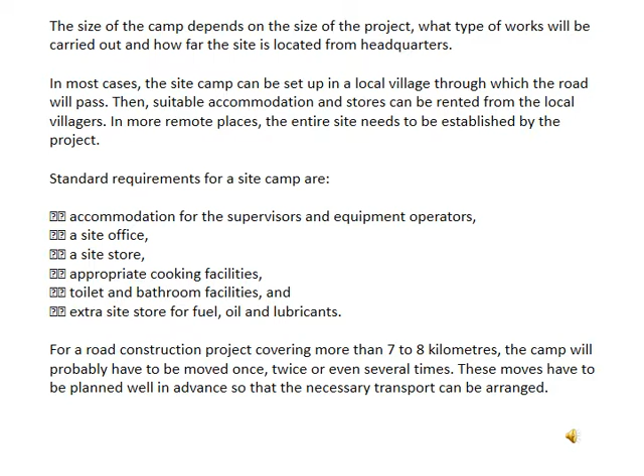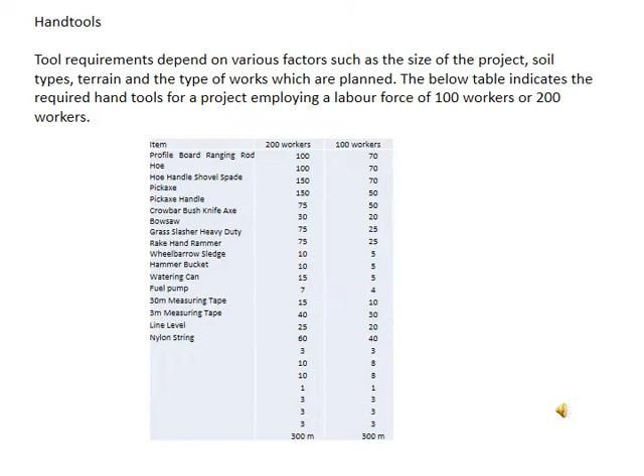Then once we are using the hand tools, all hand tools need to be maintained. All the hand tools need to be sharpened, and all the handles firmly fitted, not damaged. And if you find damage on site, you need to report to the storekeeper and have it replaced.

And for large projects, also employ a person to maintain and repair the hand tools, and also check with the local villagers; the blacksmith and carpenter need to be utilized. Also the camp is equipped with an effective sharpening tool and sufficient supply of spare parts, and the cutting edges of the axes, hoes and grass slashers are normally sharpened with a whetstone.

The edges of the other cutting tools are best kept sharp by selecting the flat, half round, and round file. For the saw, a small triangular shaped file. So those are maintenance of the hand tools.

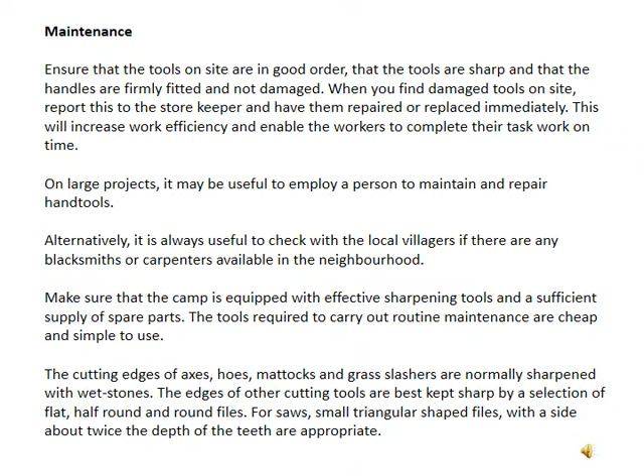A simple vice should be available at the site store, enabling the storekeeper to work effectively. This is important for the simple vice. All the spare handles must be available, and do not rely on makeshift handles made locally on site.

Wheelbarrows need to be maintained serviceable. And broken ones should be replaced before use again. So this is the guide for the devices and equipment to be maintained.

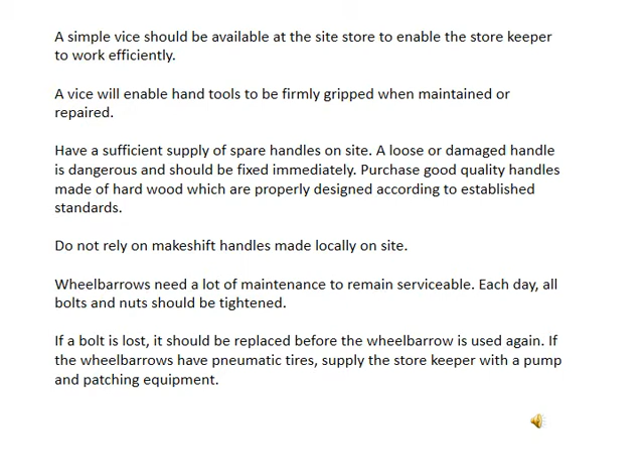There are tool stores. Tools are issued by the storekeeper to the workers every morning and returned in the afternoon after the completion of the work. Ensure that the workers are issued with the correct types of tools corresponding to the work activities they will be carrying out. The storekeeper is responsible for keeping full records of the tools and controlling the daily issue of the tools to the workers.

The total amount of tools on the site needs to be counted regularly and reported back to the headquarters. The size of the stores depends on the amount of tools to be stored. When the road site is isolated, the store has to be well stocked and therefore tends to be larger in size. The tools should be stored in a dry and secure place.

Stock items neatly so that they can easily be counted. Stock different items separately, and stock items of different sizes separately. If necessary, employ a watchman to guard the stores when the storekeeper is off duty. So this is a kind of store required for the tools.

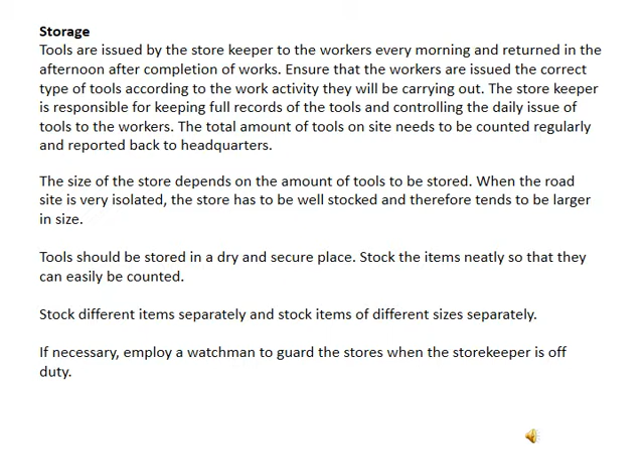Each piece of the equipment has an operator manual which specifies where the lubrication and adjustments are required. As a rule of thumb, the following activities should be carried out on a daily basis. Clean and check the lubrication oil level, radiator water level, hydraulic oil level, hydraulic hose and the couplings, grease nipples and the track, battery terminals and battery water, connections from the alternator, the V-belt and the tension, tire

pressure and the tracks, transmission oil level, brake and clutch fluid level, and the nuts and bolts of the buckets and tracks. Those need to be cleaned and checked.

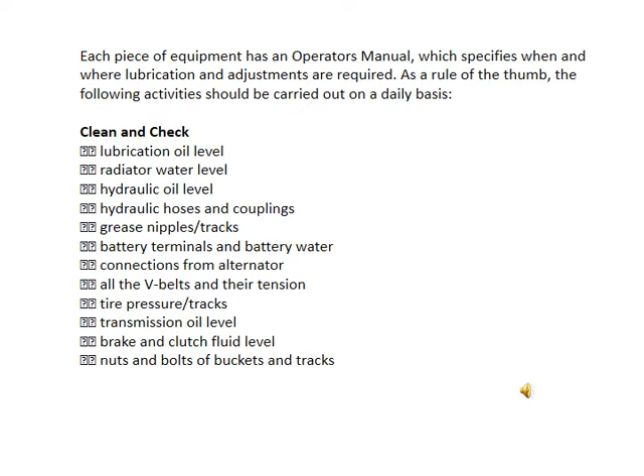Supply of material should be made well in advance of its planned consumption. Ensure that sufficient materials are available on site before commencing the works for which the materials are planned, and notify the engineer in good time when stores need to be replenished. When the materials are received on the site, it is the responsibility of the storekeeper to inspect and verify that stores are in good order and the correct quantity. Finally, the materials are recorded in the store's ledger.

Fuel oil and lubricants should be stored separately away from the other supplies. These items can be a fire hazard if not treated properly. Make sure that there are no open fires nearby, such as the fireplace for cooking, etc. Fuel oil is normally stored in drums. Make sure that all consumption of fuel oil and lubricants is properly recorded and accounted for. So this is how to keep the material store, the fuel oil and lubricants.

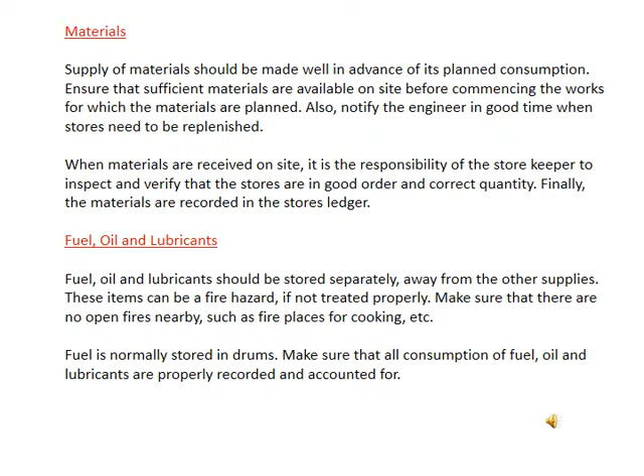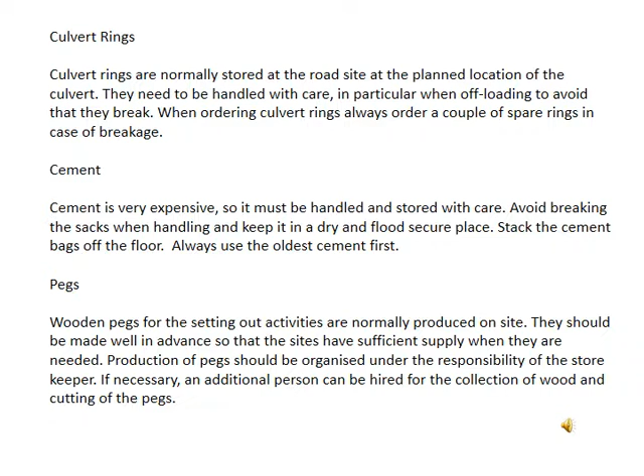Basic principle of setting out: before we start, these are the rules for making a setting out. The commonly used setting out procedure is based on the use of a series of profile boards and string lines, giving control of the levels during the construction. As a result, the method became known as the Profile Board Method. The basic principle when using profile posts is that when we set them out, we are putting a series of level boards that show us a level 1 meter above the completed construction level.

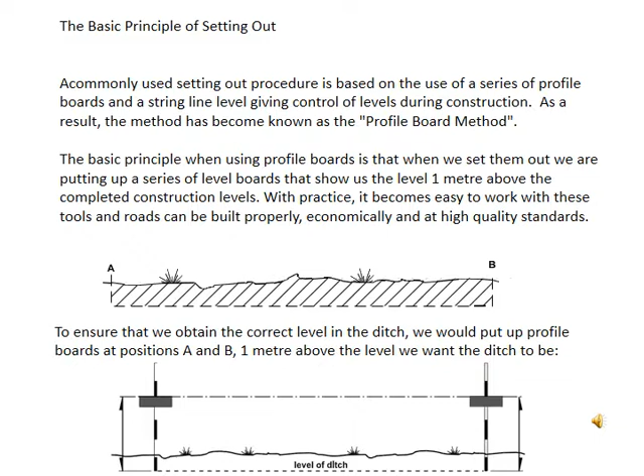The profile posts' positions need to be placed here. The traveler is the third profile board so we can move around.

It is known as the traveling profile or the traveler, that profile with the traveler. Along the line from A to B, we excavate slots to the level of the ditch. We place the traveler in the slot and sight from the profile board, position A, to the profile board in position B. So this is the traveler we need to provide.

So to provide good guidance, our slots are done at regular intervals every 4 to 5 meters along the sight line. When sufficient slots have been done, the worker can start excavating the ditch by joining the slots. The traveler can be used to check that the finished work is at the correct level and there are no high or low spots. So this is the way we make the traveler.

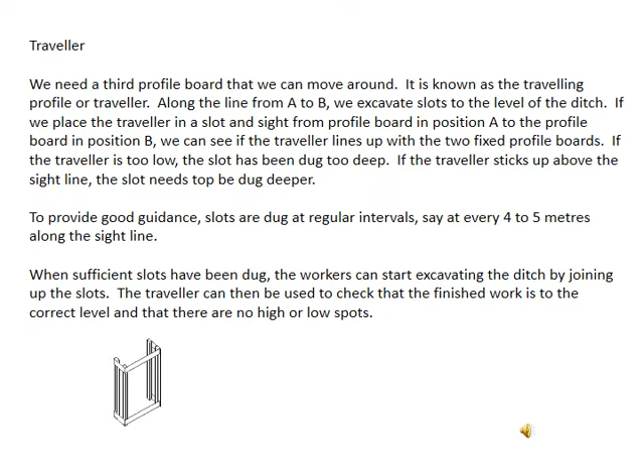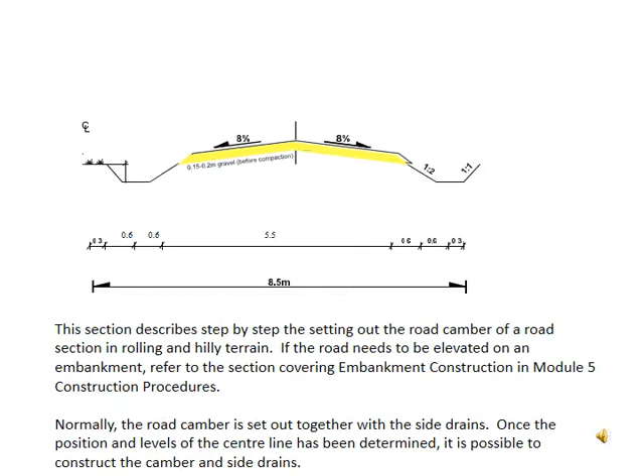When setting out the road camber and the side drains, it is important to reduce the amount of excavation to a minimum by following the existing level of the terrain along the road line. The procedure described below is the efficient way of setting out the road levels.

Step 1: Using the previously set center line, set the ranging rods at 10 meter intervals along the center line for a section of 50 to 100 meters. So the 10 meter intervals and a section of 50 to 100 meters have to be set out.

At the start of the section, measure the position of the road shoulder and the outer end of the side drain from the center line. The width is assigned at the other end of the section, and place a wooden peg nail at the edge of the ranging rod.

Step 2: Once the position of the road has been set out at the start and end of the road section, set the intermediate ranging rod at intervals of 10 meters along the road shoulder and the side drains. So this is the setting out procedure.

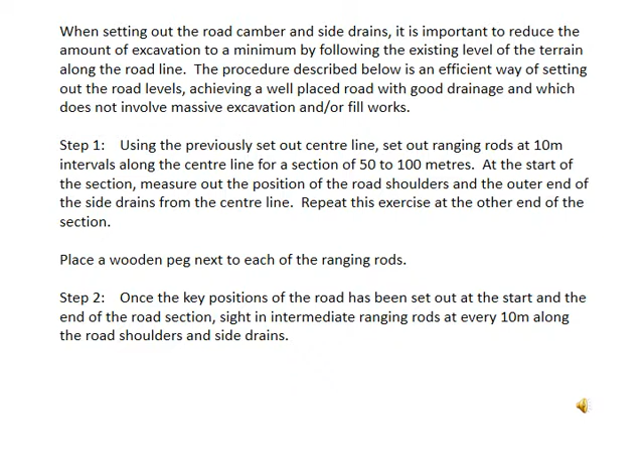Step 3: On the center line of the road, fix the first profile board. This profile may already be in position as the last profile from the previous setting out. If not, measure 1 meter up from the existing ground level and mark the level on the ranging rod.

Fit the profile board to the ranging rod so that the top edge of the profile board is at the mark made on the rod. So in this case, you can see the profile board.

Go to the center line, reaching the rod at the other end of the road section, and repeat the procedure, measuring 1 meter from the ground level.

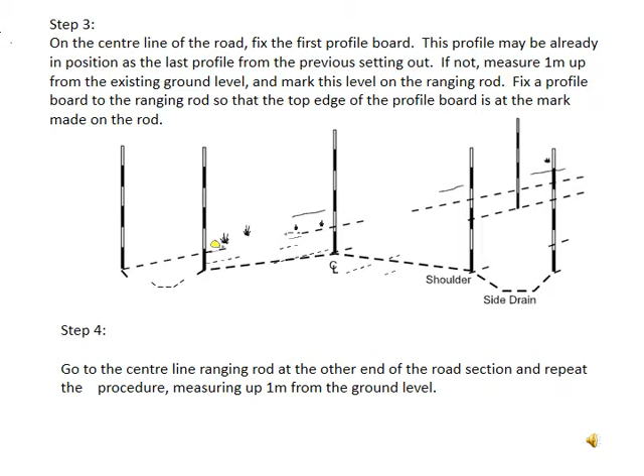In this diagram, you can see the stepwise setup development on the profile book. By sighting the intermediate profile from the end, fix the profile board on the intermediate ranging rods along the center line so that they can all be at the same level.

So we can put the same level on the profile board, and you can also set it up.

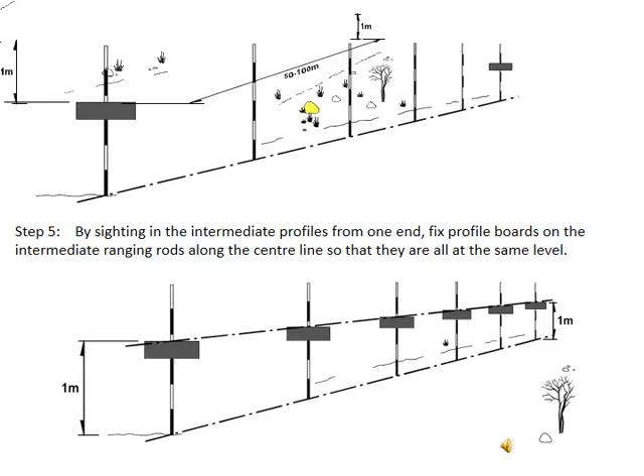Check the height of each profile board above the ground level. If the height is approximately 1 meter, there is no need to adjust them, and you can use the level of the profile as it is.

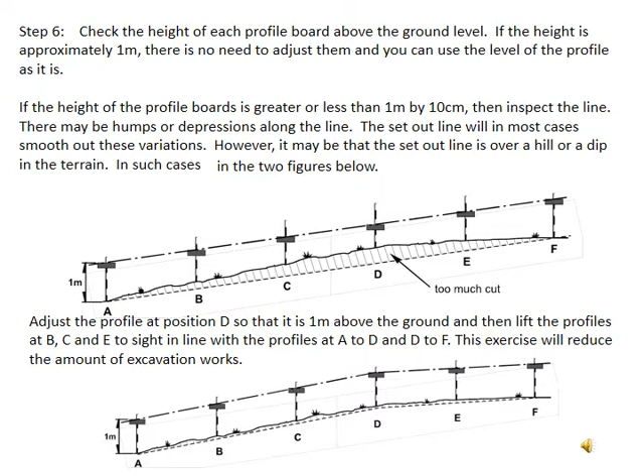So that when we are setting out the profile posts, this is the general rule: it is better to lift the profile rather than to drop them.

Try to keep the lifts and drops and keep it to less than 10 centimeters. Try to match the road level to the terrain and use the profile to get a picture of the vertical alignment. Before starting on the next step, make sure that the side drain can be emptied.

It is important to spend time on step 7, transferring the level to the ranging rods at the outer end of the side drain.

Start with the beginning of your road using the string and the line level, transfer the level of the profile board at the center line to the ditches on both sides of the road.

Once the levels are set out with the profile board, mark the level on pegs next to each ranging rod, and repeat this procedure for the same ranging rod at the other end of the road section.

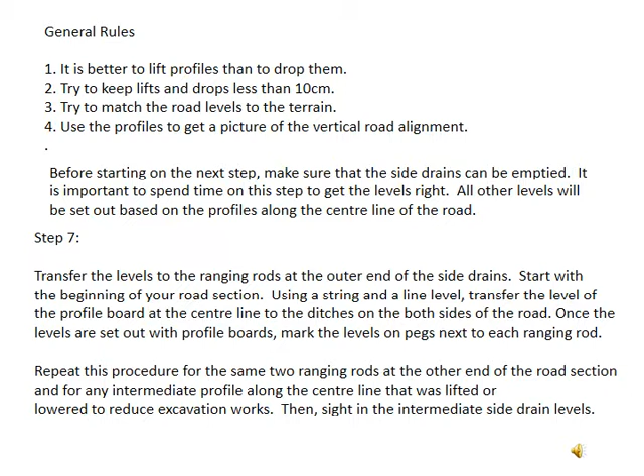So in this diagram, you can see the arrangement of the profile board and the location and how much to dig.

Step 8 is to mark the level of the center line on the pegs next to the ranging rod, so that when we are putting the profile board, after that you can put the peg. That peg also needs marking.

So you have to use the center line profile board, set out intermediate pegs every 5 meters along the center line. Every 5 meters along the center line, we have to put these pegs.

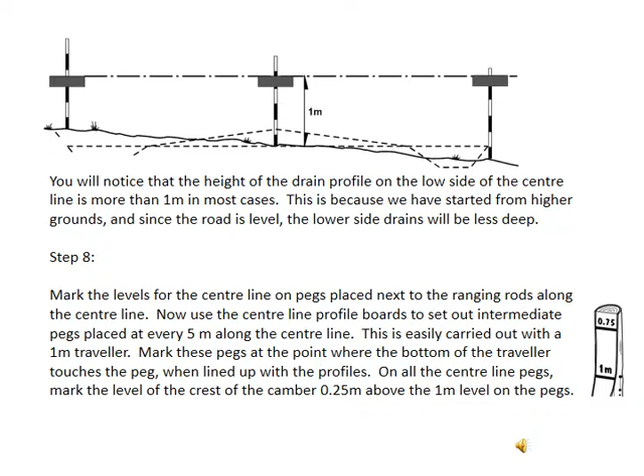And then we also place a level of the shoulder along the road.

So road shoulder we have to place. It is useful to have the travelers at 1 meter high, so the traveler has to be located at 1 meter height. Line up the traveler along the line between the two side drain profiles.

Place the pegs every 5 meters along the edge of the shoulder, and using the traveler, mark the pegs at the point when the bottom of the traveler ends when it is lined up with the profiles. Step 10 is to locate and set out the miter drain.

It is important that miter drains are set out before the excavation works for the side drain and the camber is commenced. Step 11, set out with the string line, and the side drain needs to be excavated, and remember to leave out the miter drain block-offs. So those are the requirements for this.

So, profile for setting out the miter drain.

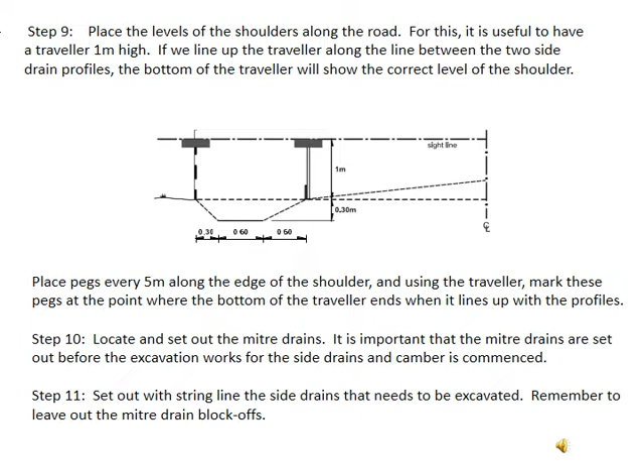Clearing includes heavy bush clearing, boulder removal, and topsoil removal. All the bush has to be cleared, boulders cleared, topsoil cleared. Most agricultural lands are open areas that erode with a very thin topsoil layer, which can be mixed with the earthworks of the road construction. Topsoil removal is executed using task work on an area basis.

So those things have to be done. Topsoil removal is only needed when the topsoil is 10 to 15 centimeters, very organic, and obviously much weaker in strength than the soil below. Unnecessary topsoil removal has very little effect on the strength of the road.

So we have to remove the topsoil, clear the bush, and clear the boulders. Those are the clearing tasks. In the diagram you can see what kind of clearing has to be done.

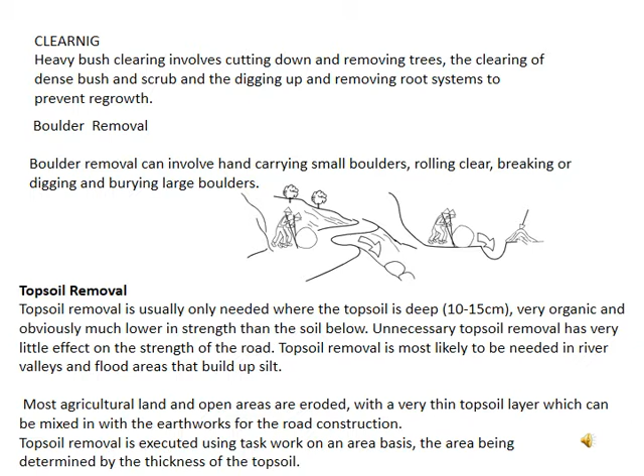Basically, the road construction earthworks involves digging the drain and using the material to build the camber, excavating cut to fill to form the road and building the road or embankment and the flat area with poor drainage. So this is the earthwork that has to be done.

Earthwork includes side drain excavation and camber formation. The work is simply to excavate the side drain and use the materials to form the camber. Ensure that the volume of the side drain is slightly more than what is needed to form the camber.

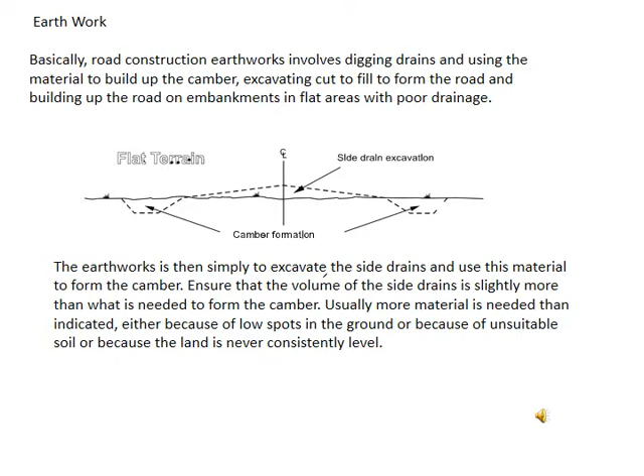The challenges really begin when the road has a big cross-slope on sloping ground. The steeper the road cross-slope, the more excavation needed to build the road. Always try to avoid as steep a cross-slope as possible.

Locate the road on the ridge when possible. So in this case, for sloping terrain roads to be constructed, on the low side of the terrain, we can place the road. This is the way a road is constructed on sloping terrain.

Road construction on cross sloping terrains has the following features: the high side drain will have to be dug deep, the low side drain is normally not needed, and the road will have to be built up on the low side. So this is road construction cost for sloping terrain.

The best way to do it is to split the work into two stages.

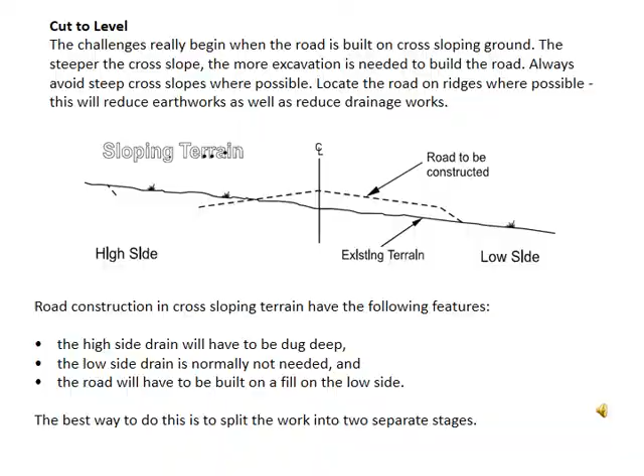You can see the excavated high side drain and the formed camber. In this case, you can see on the road: on the low side you don't need to put the drain, and on the high side you have to put the drain, and you also make the formed camber.

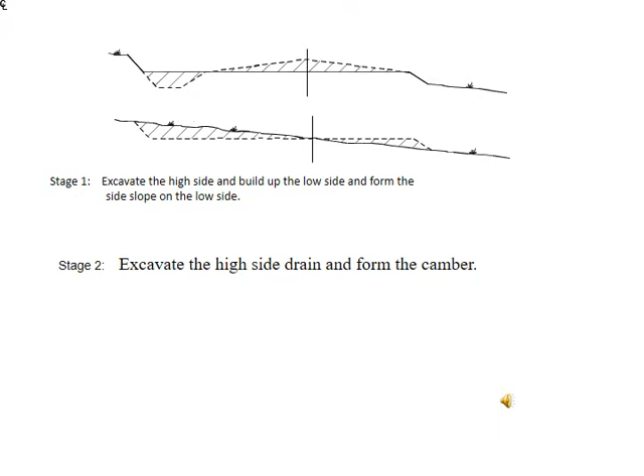In this case, the method of working is that the excavation approximately balances the amount of fill needed. So by making the excavation, it can also balance the amount of fill needed, and also the fill material can be obtained as close as possible to where it's needed, reducing the need for longitudinal haulage.

By leveling the formation only as far as the edge of the road and then sloping down to the natural ground, we reduce the excavation and in most cases avoid the need for the side drain on the low side. The excavation and the fill are balanced each side of the center line, but the width of the excavation has to give sufficient room for the side drain, which affects the setting of the dimension of the excavation on the high side.

For example, assuming the road carriageway width of 5.5 meters and the side drain width of 1.5 meters, the total leveling width to the outside of the center line will be 5.5 divided by 2 plus 1.5, equals 4.25 meters.

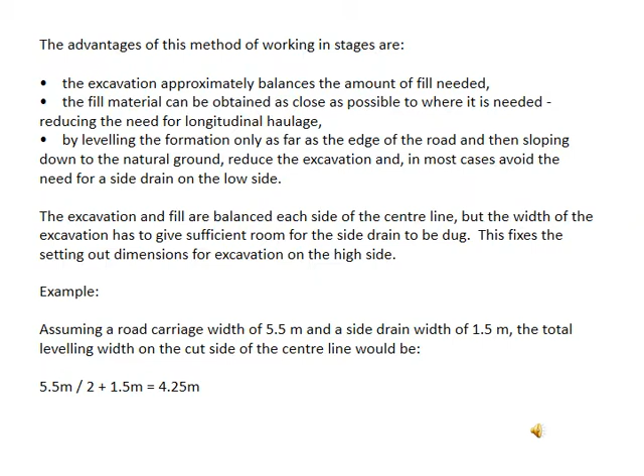You can also see the day-by-day work. So day 1, day 2, day 3, we can make the excavation and do the job. When the center profiles are set out at 1 meter above the ground level, we can measure the height of the high side profile to tell how steep the slope is, the depth of the cut, and the volume of the leveling work and the back sloping. So you can see the 1 meter level, and then how to set the depth of the excavation.

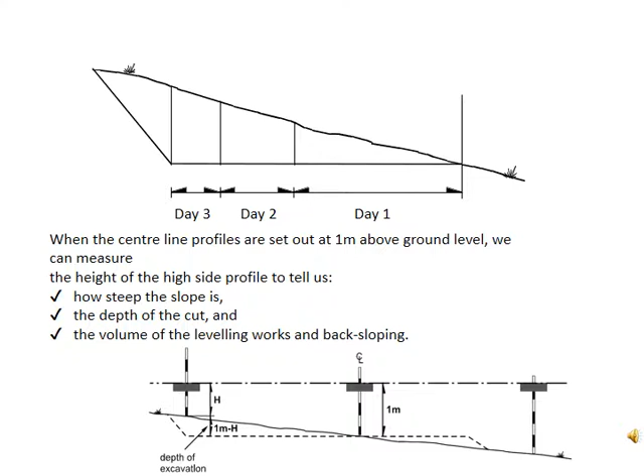In this case, when there is a little cross slope, with every height of the high side profile at 90 or 95 centimeters, it is possible to dig the high side drain without leveling first. However, there are advantages to leveling in these conditions. Setting out the side drain is easier on a level surface, and the side drain is easier to dig to the correct shape. The supervisor will usually level these minor cross slopes.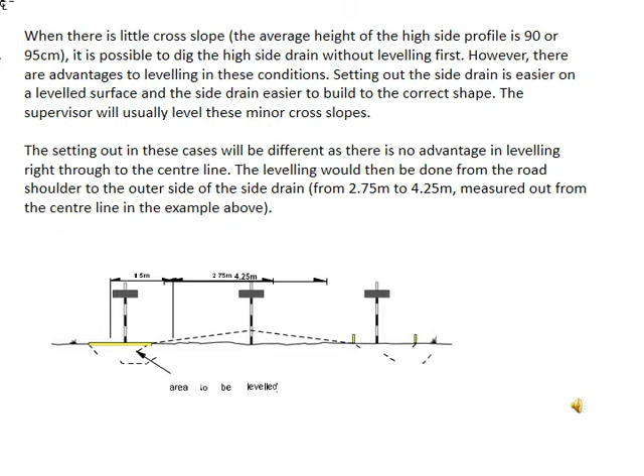When rehabilitating the existing road, leveling should be kept to the minimum. In this case, the existing road level is no good, so we have to do the rehabilitation. We have to calculate the volume to be excavated from the common profile height to be found in practice. Before we do the job, you also need to calculate the amount of the volume to be excavated.

This volume can be given to the supervisor in table form and can be used to work out the workdays needed to carry out the excavation and to report the volume of completed work. Therefore, the volume of earth to be removed determines the number of work days, so this volume needs to be accurately calculated. Based on this volume, the supervisor will calculate the work day requirements.

The slope of the ground is not the same along the length of the road. To set out the work, we have to find the average slope over the 20 meter section. The slope of the road is different from one place to another, so over the 20 meter section we have to measure the slope and then find out the average.

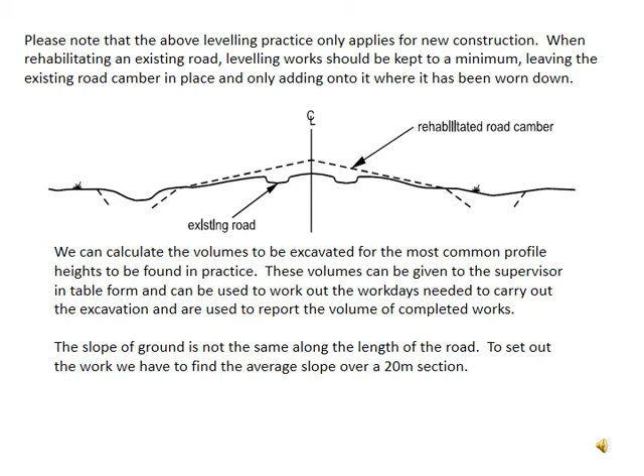Also start constructing the camber and the side drain. We have to start excavating the side drain and then make the level. Once the excavation and fill has been completed, the road camber is constructed using the soil from the side drain and the back slope. After the side drains are dug, that soil is utilized and then you can construct the cambers.

The excavated soil from the drain should first be thrown to the center of the road and leveled to the road shoulder from the camber. Side drain excavation is done in two stages. First, the ditch is excavated, then the side slope of the ditch is excavated. Normally, 1 or 2 days are allowed between each stage to allow sufficient working space for the workers. The side drain excavation is set out using a string line and checked using ditch templates.

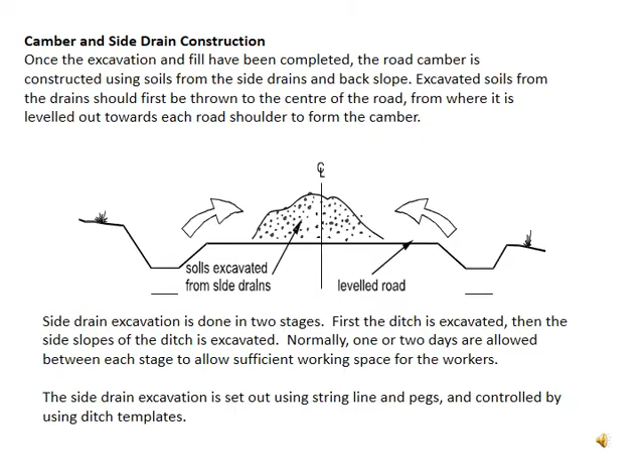For the construction of the ditching and the sloping, the tasks are sized as the length of side drain for each worker. The sloping task is normally set slightly higher than the ditching task, because excavation of the soil on the slope is easier than excavation of the ditch. The soil excavated from the side drain is used to construct the road camber. To achieve an even and properly leveled camber, the work is set out using pegs and string.

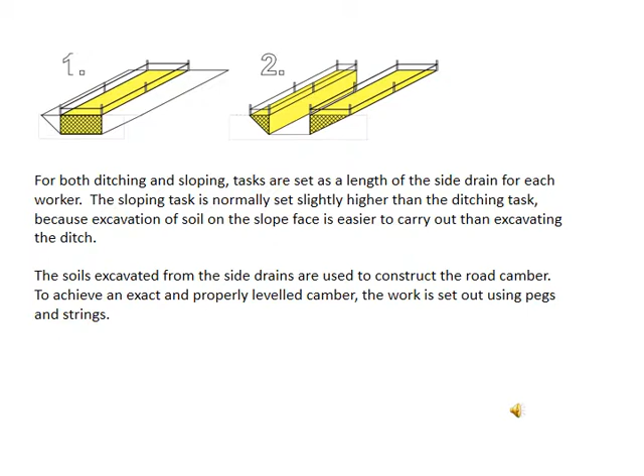This is a construction of the road, so you can see both side drains and the formation of the road. Once the soil for the camber has been leveled, the camber is properly compacted. Make sure that the soil contains the optimum moisture content. After the camber has been leveled, it all has to be compacted, and the moisture needs to be optimum.

After the compaction has been completed, it is important to check the final level of the road camber, that it's exact and to the prescribed standard of quality. So after the camber has been completed, you have to check. This can be done by setting profile boards and controlling the level between the profiles with the traveler. So you can see how to put the profile board. Those profile boards are recorded, and we can draw the graph, and then we can make the comparison.

A quicker method, however less accurate, uses a string line to check the level of the completed surface. If the surface levels are inaccurate, the irregularities should be removed or filled in. If further fill-in is required, make sure that the patching is also properly compacted. Finally, again check the levels to ensure that the earthworks are completed to the correct standards.

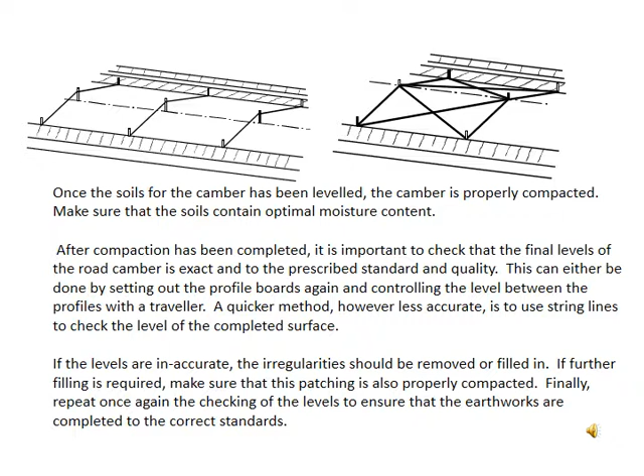Embankment. The embankment requires a large amount of fill material and is expensive to construct. It should be avoided where possible by selecting a longer route on higher ground. Where possible, materials should be excavated alongside the road and then carried to the road by basket or wheelbarrow. It is important to keep the height of the embankment to the requirement.

Highest annual flood levels are also used to determine the embankment height. So when we are designing this embankment, the annual flood level has to be considered. The center line alignment should be carefully selected to avoid low-lying areas requiring extra fill. So this is the way we have the embankment.